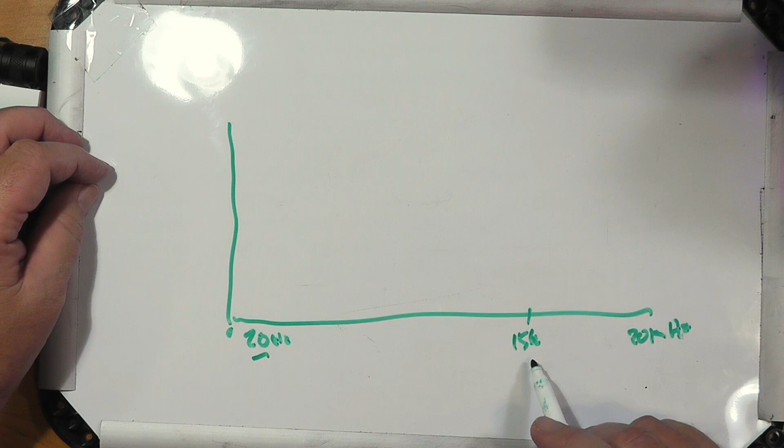The Bell Telephone Company, the Bell Labs, put a lot of work during those first years of television into understanding the spectrum requirements of human hearing. They wanted the bandwidth on their telephone systems to be the minimum necessary so that you could, 1, understand what the other person says, and 2, recognize the voice. Okay? And here's what they came up with. Instead of starting at 20 hertz and ending at 15 kilohertz, they developed what they call the A-weighted.

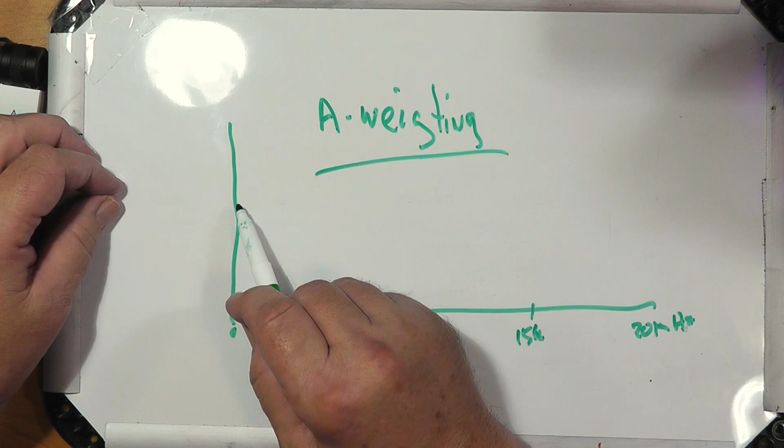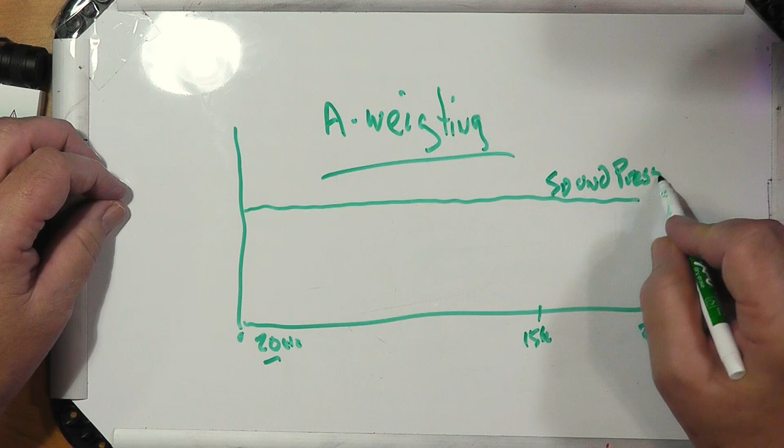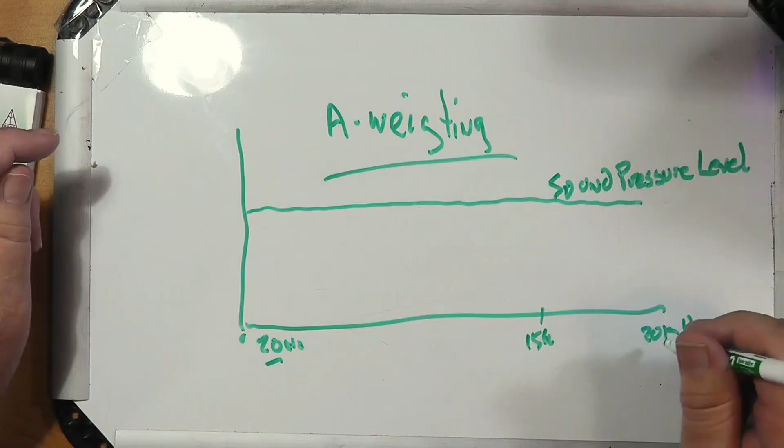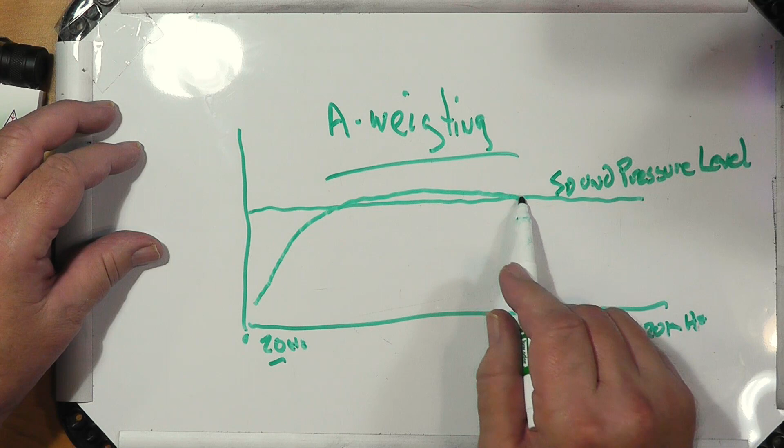And you, by the way, can find this in Wikipedia. This is a curve called sound pressure level. Now, sound waves are longitudinal waves in air, okay? It's like a push-pull, and above 20 kilohertz is considered ultrasonic. And so it starts out around 20, but really the human hearing starts out a little above that and comes up kind of slowly, comes up slightly above, and then comes down like this.

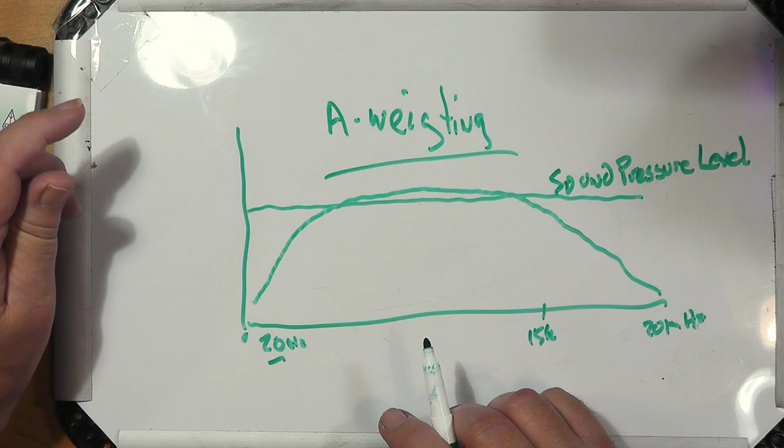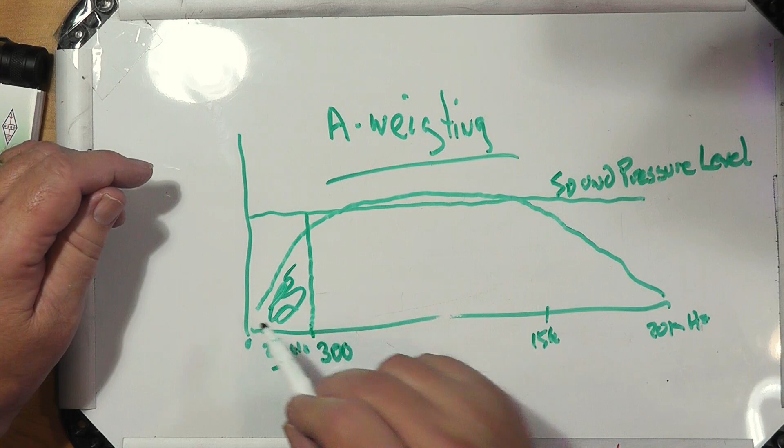Okay? Now, the problem that they had was they couldn't put 15 kilohertz circuits in anywhere. It would just take up way too much equipment. So they decided that the communications bandwidth for a local phone call would start at 300 hertz. Notice how much of that eliminates. That's down here, the bass part of the voice, the part of the voice that is sort of in the basement, holds up the rest of the structure.

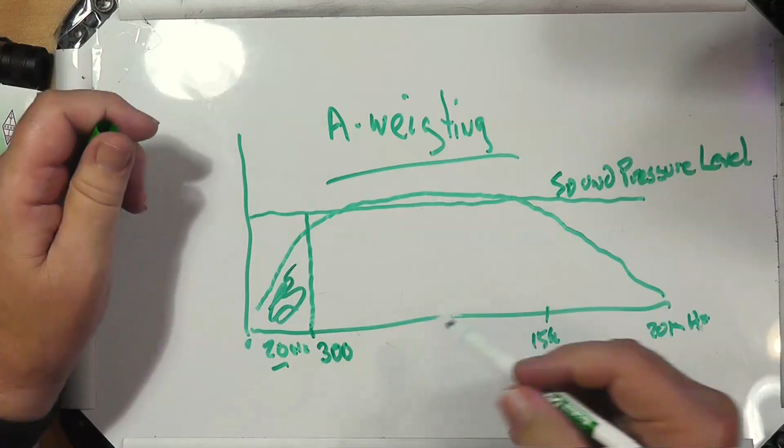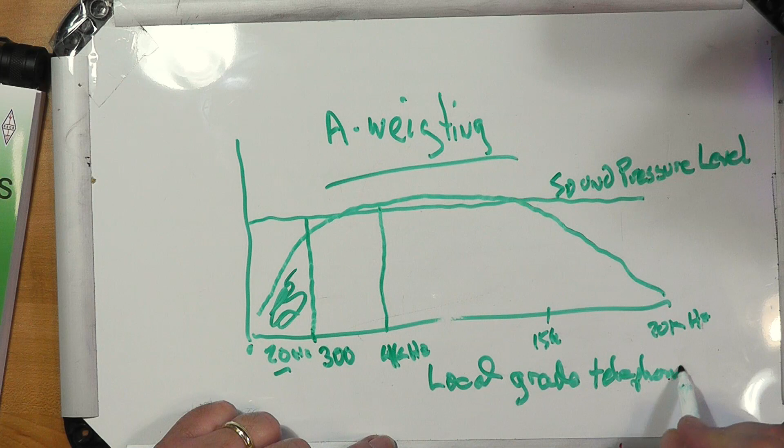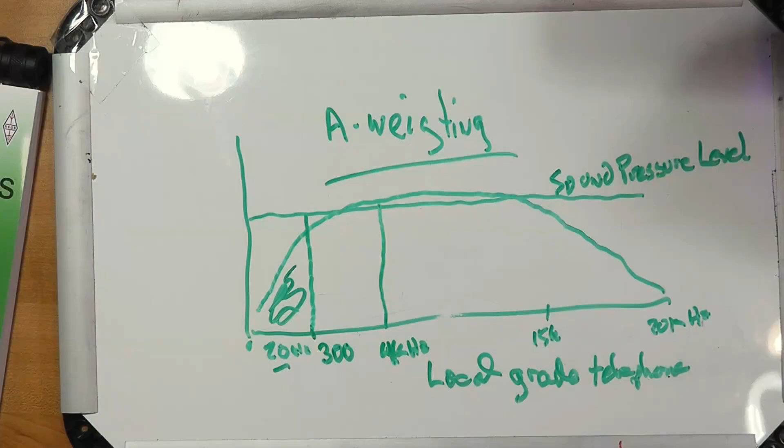And they decided that instead of 15K, they'd go to 4 kilohertz. Okay, this is called local grade telephone. From 300 hertz to 4 kilohertz. Now, when it came time to go ahead and make long distance calls, they cut this at the top at 3 kilohertz. So from 300 to 3,000 hertz is called toll grade.

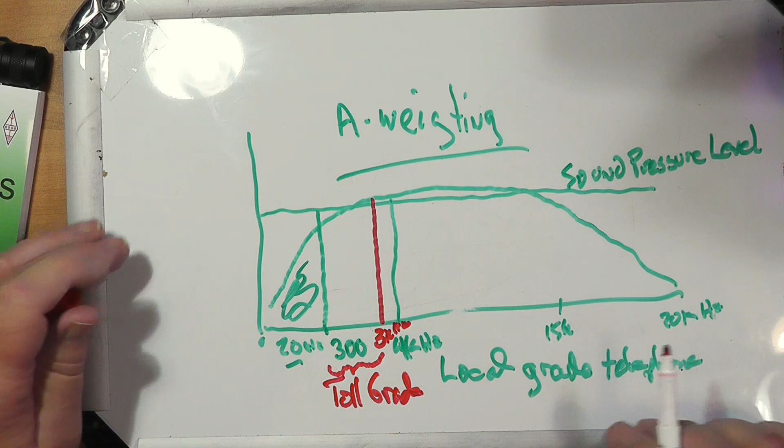Now, you can see the history here. Toll means long distance, okay? That you're going to pay for that. And this is what you get, 300 to 3,000. This is why if you're of a certain age, you can remember the old system that Bell Telephone had, where you would dial the long distance number, and there'd be lots of clicks and clacks, and you'd hear finally the person come on the line, and they sounded a little hollow and not as high fidelity. So toll grade is not as high fidelity as local grade. Local grade can be very good, by the way.

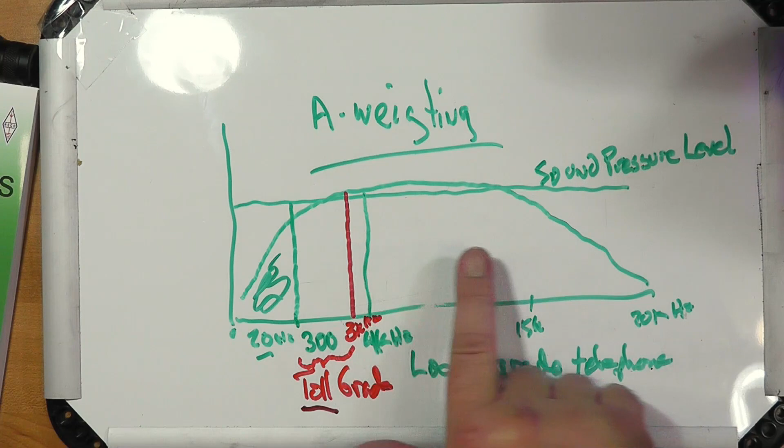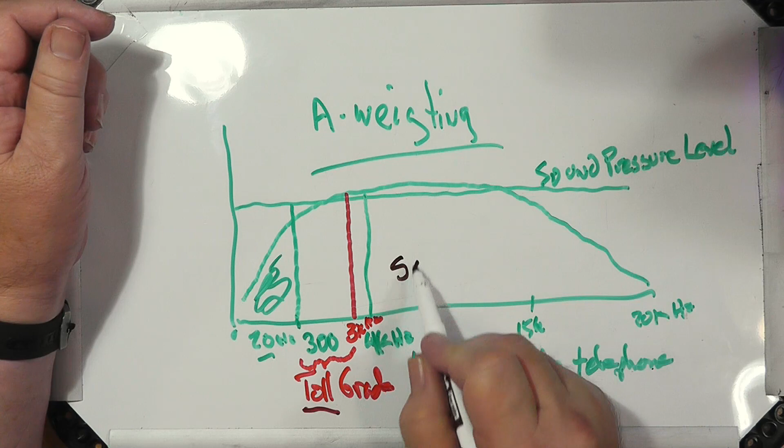In fact, if you go back in the old Strowger systems, there is no physical limit on the bandwidth, and those circuits actually can sound very, very good. But the toll grade is 300 to 3,000. Now look at all the hearing that's leaving out. These are all your sibilants. The S's and T's and scratches and so much like that. So I'll write down here sibilants. And of course it's leaving out the bass.

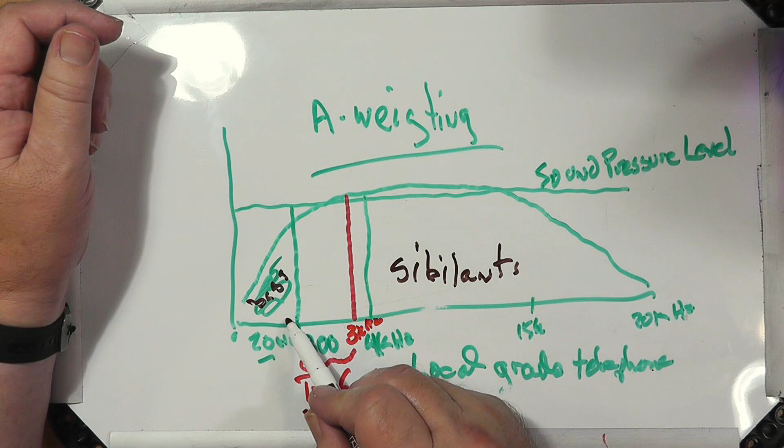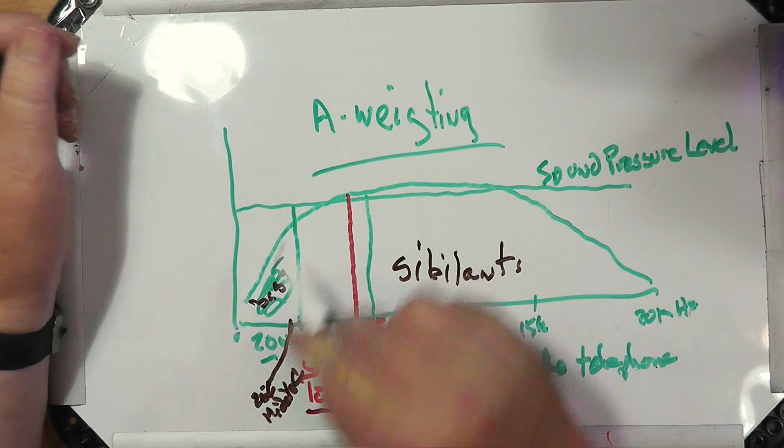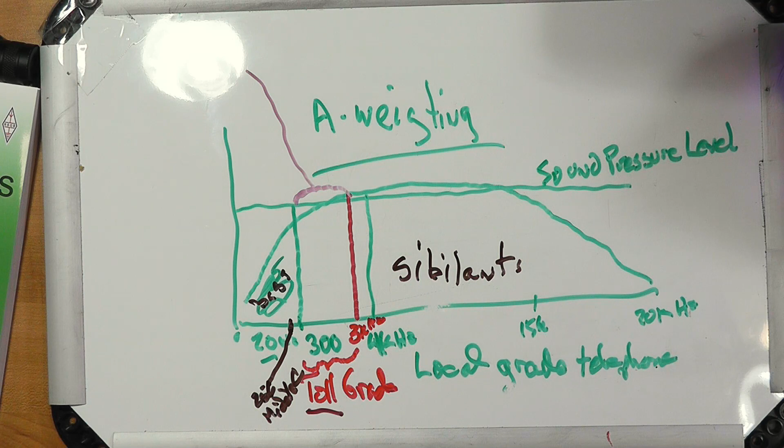Now it's interesting to note, starting at 300 here, right here at about 256-ish, is middle C. So all the bass is gone. Now, the harmonics of the bass are not gone, but all the bass is gone. So from about middle C up to 3,000, okay. And this is where, when they started putting single sideband together, they put single sideband together here. They used that bandwidth because it was a standard bandwidth for the transmission of human voice over toll grade circuits.

Take a moment out to get something to drink.

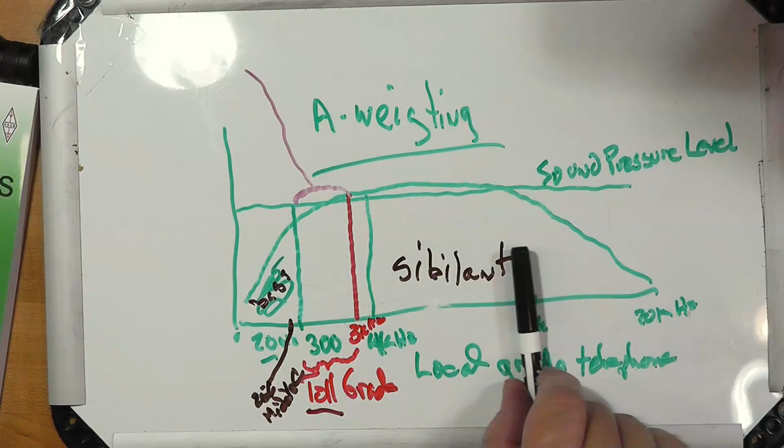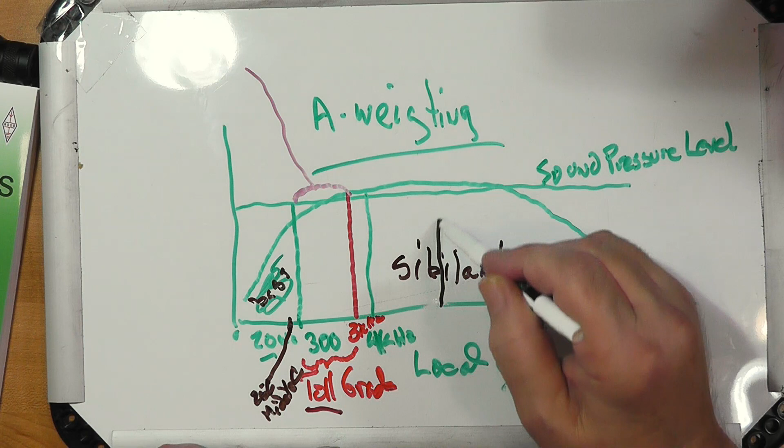Now, that means if you're an older person and your hearing is starting to go, what usually goes is from the top down. You start losing hearing in the top part. My hearing, for example, stops at 8K. Now, I can still enjoy music and things like that at 8K, but the real high pitch stuff is lost on me. There are notes on my organ I cannot hear.

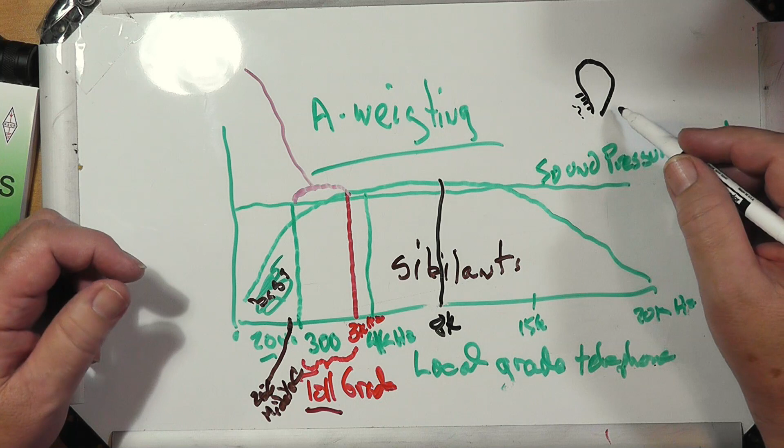The way the human ear works, in the inner ear, there's I think it's the cochlea, and it's got little hairs. Now, it's got a viscous medium in here, so sound travels. The speed of sound is much lower in here, and these hairs get longer around here. And an individual hair, actually several hairs nearby, will vibrate slightly when you hear a pure tone. And your ear is very, very good at determining tone. And you get these combinations of tones in real time that give you the sense of hearing.

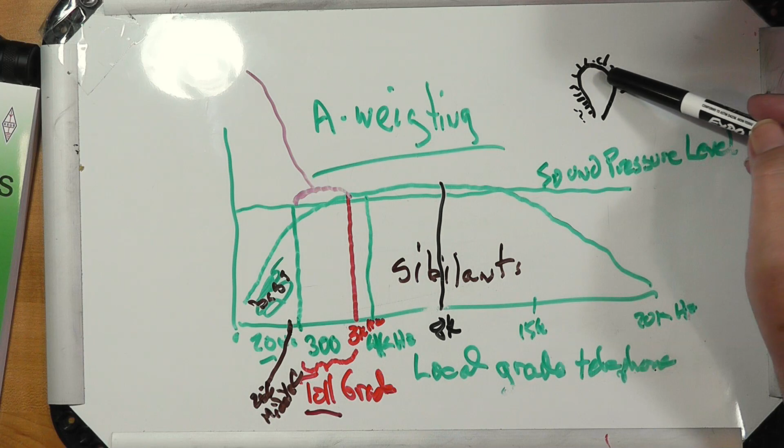Now, because of the way this thing is set up, it's not real sensitive to phase. So if this is wiggling and this is wiggling and one is a harmonic of the other and they're out of phase, you won't hear that. Now, people who have trained their hearing, musicians and so on, can hear the difference in phase. I did an experiment on that in an earlier video where I played two tones that were changing in phase. And some people said they could tell a difference. A lot of others said they couldn't. Most people can't without training.

So what can go wrong with hearing? Well, you can have problems in here, okay, to where some of these are no longer active. There are people who have a little shaved head right here, and what they've done down in the cochlea is put an insert in the cochlea so that it can stimulate the cochlea directly. Now, the problem with this method is you don't hear the lows so much. So if your hearing is, say, in here, you'll hear the part of the voice spectrum

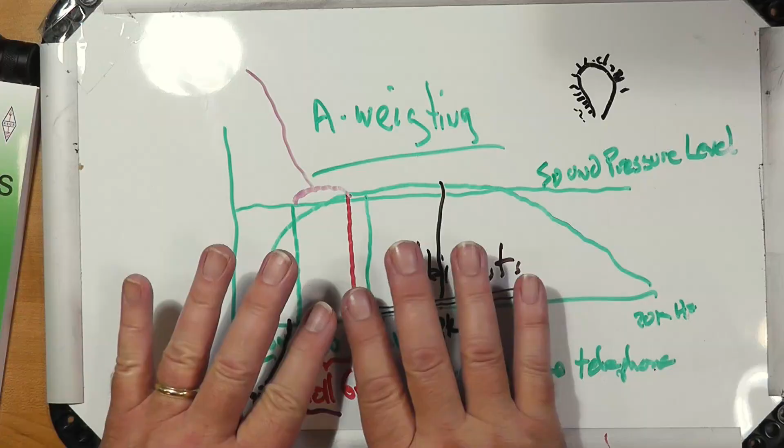that allows the letters and so on to be distinguished one from another, okay? And the problem is that because this doesn't do real well with the low frequencies, if you're up here past 3K mostly, you won't get the right frequencies over single sideband in order to make that work. So I would suggest consulting with your hearing doctor and talking to him about this 300 to 3,000 hertz slice here and see if that can make sense for you.

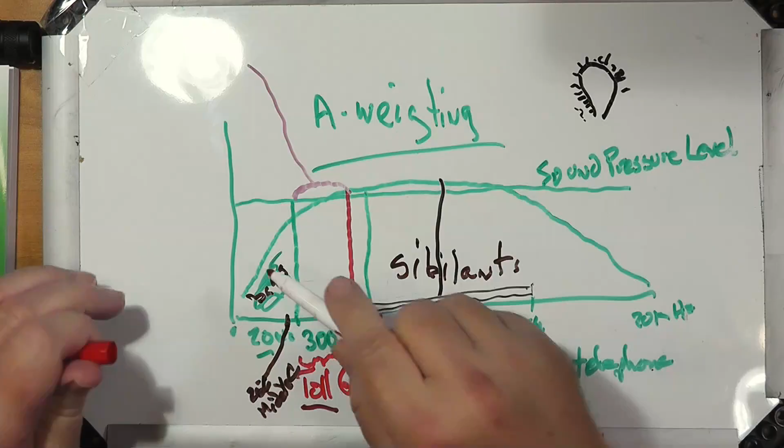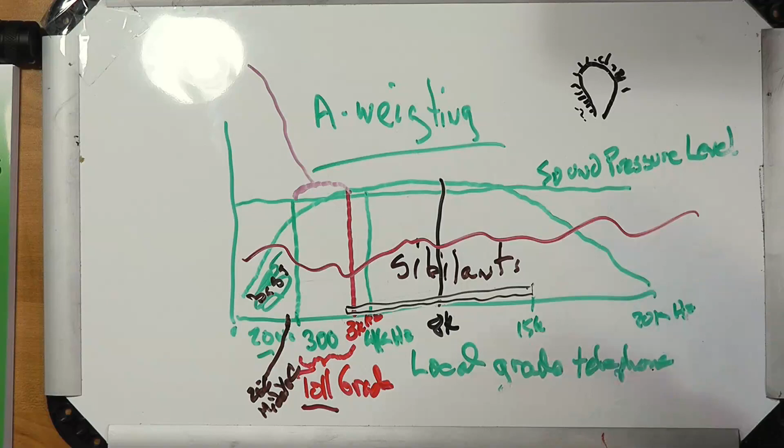Now there are other things that can go wrong that can cause some sort of a bad curve in your hearing right here, which again, this is the part that's from single sideband. This stuff up here is an important part of speech, music, and so on. Have you ever noticed how music sounds terrible over the telephone? You know, music on hold, stuff like that. That's because of this toll quality problem that we have right here. Okay, so there you have it.

This is an approach. I'm not going to say that this is Tom's approach or Tom's problem, but this is a problem that many people have with their hearing. My hearing already has been attenuated down to about 8,000 hertz. Okay, and so I'm not picking up this stuff up here.

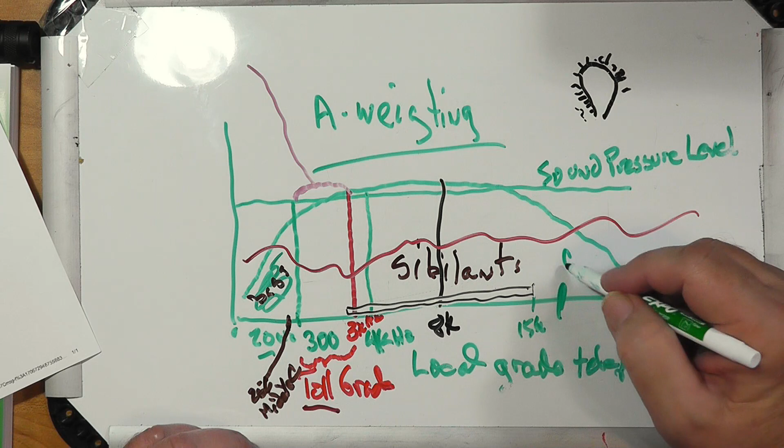When I was a kid, I could hear up here, and I could hear the TV flyback transformers because they would make a repetitive sound at about 15 kilohertz. It was the thing that caused the dot on the television to fly back to the beginning of the line, start a new line, fly back to the beginning of the line, start a new line, and so on. I could actually hear that. Not anymore. I haven't in years. Okay, I hope this helps.